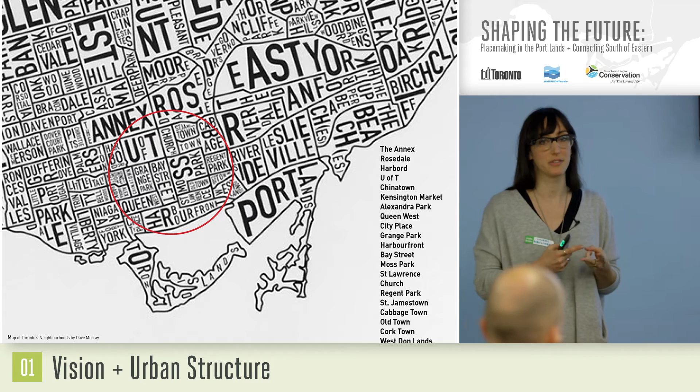These are diverse neighborhoods that have different histories, different characters, that accommodate different uses and different populations, all within this area. The same area of the Port Lands, which on the one hand, we think of singularly as the Port Lands, but it makes us wonder, is it just the Port Lands? And could the idea of diversity actually become something that's central to the vision?

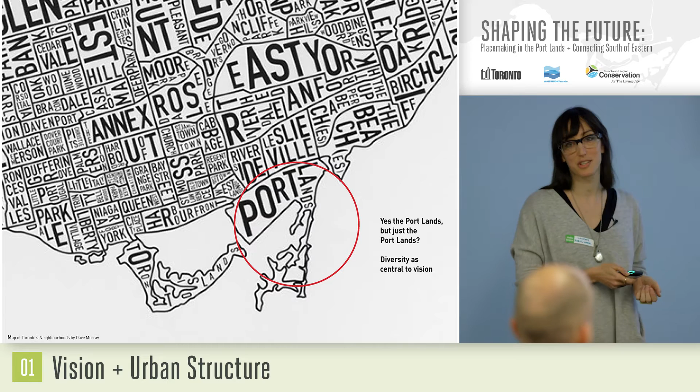So the vision for the Port Lands, we believe, can be as layered and diverse as the place itself and the people who inhabit it. Just like the city of Toronto, that can be its strength. And the vision for the Port Lands, we really think, in order to be diverse, has to be a collective one. It has to be ours.

It's actually big enough to accommodate multiple visions. So visions that are already underway, visions that we're talking about now, and visions that we can't even foresee yet in the future. But at the same time, we think it can also retain this really unique quality that it has, what we've been referring to as the one and only Portlands.

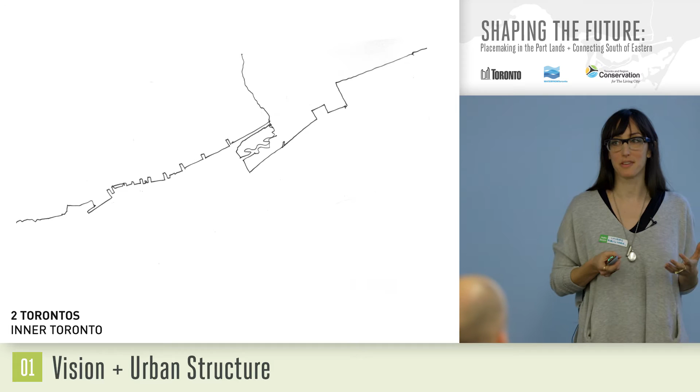And if you start to look more closely at the site, we think that there's already a kind of authentic diversity that's there now. So what do we mean by two Torontos? Well, this is kind of an observation that we've made. There's the inner Toronto, as we're calling it, which I think is the Toronto that we're all most familiar with. It's the urban Toronto, the one of streets, the one of blocks, the one of parks, the one of commerce.

But there's also another Toronto that maybe sometimes some of us forget about. It's this kind of wild green fringe that hugs the southern edge of the city. And it is occupied, it is developed in places, but it's developed in a different kind of way than the urban inner Toronto that we know.

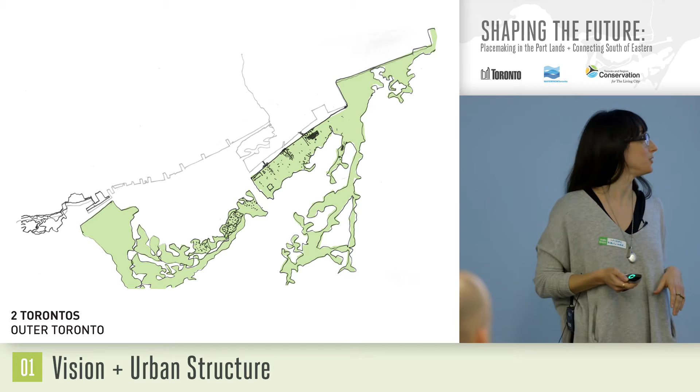And we think that's actually a quality that's really important to the wilds in the outer Toronto. And these two kinds of Toronto come together at this seam, this blue seam, which is the ship channel. And it makes us wonder if in transforming the Port Lands, that the qualities that are already there, these two different qualities, might actually inform, and might be something we can build upon, and that this significant blue ship channel element in the middle is somehow really central to the vision for how this neighborhood revitalizes.

And then we thought we would even start to look more closely and try to better understand what are the unique and inherent diversities that already exist on the site, the one and only Portlands. And so in order to do this, we held, amongst other things, a really great workshop two summers ago. We brought a whole bunch of different participants together, a range of backgrounds, and we thought if we're really going to have a ground-up vision, it has to come from all of us.

And so we started by really getting to know the site. We walked the site, we biked the site, but most importantly, we took a boat out, because in this water-centric area of the city, how can you possibly get to know it unless you're literally on the water? And we tasked participants with recording for us images, atmospheres, elements, objects, structures that represented to them the one and only Portlands, the qualities that made this place special. And we took this inventory of images and we started to call them the exceptions and the exceptional.

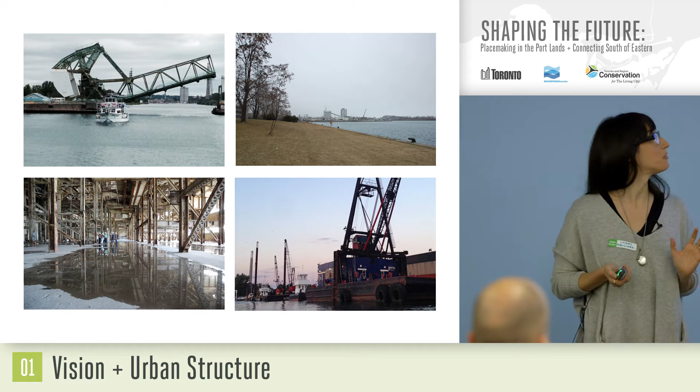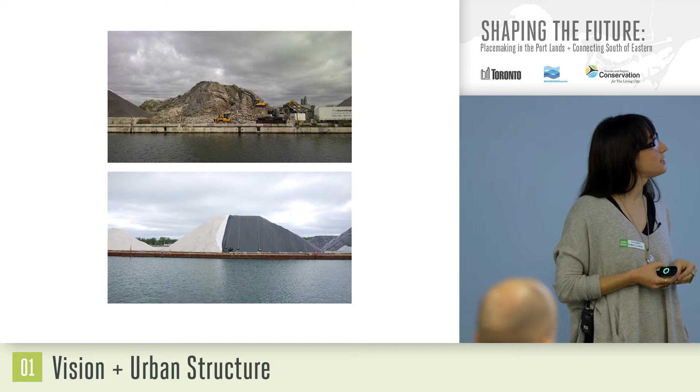We got a remarkable range of photographs, things that spoke to industry, both past and present: the absolutely awe-inspiring scale of the industrial architecture, and also this overgrown, strangely beautiful, wild and natural condition that layers with past infrastructures. And there's an active industry, work that's being done there daily, which also layers into what makes this place unique and creates these positive frictions.

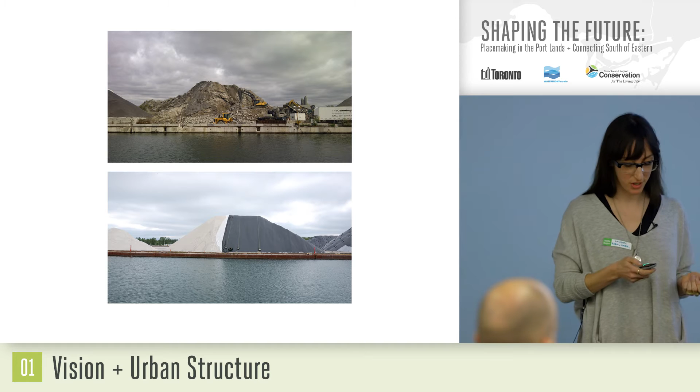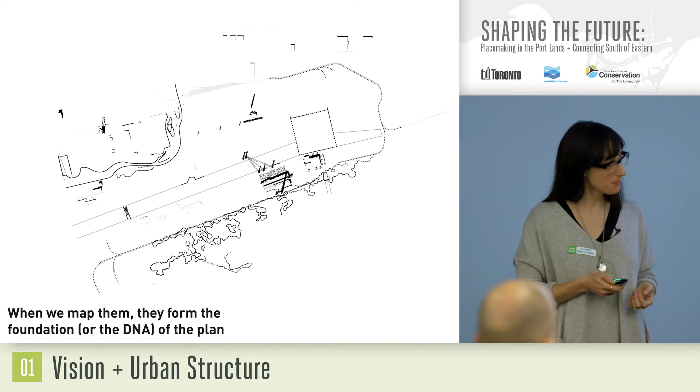So we mapped all these things out, and we think they're foundational to how the area is going to develop. We called it the DNA of the plan, upon which all of the layers would build.

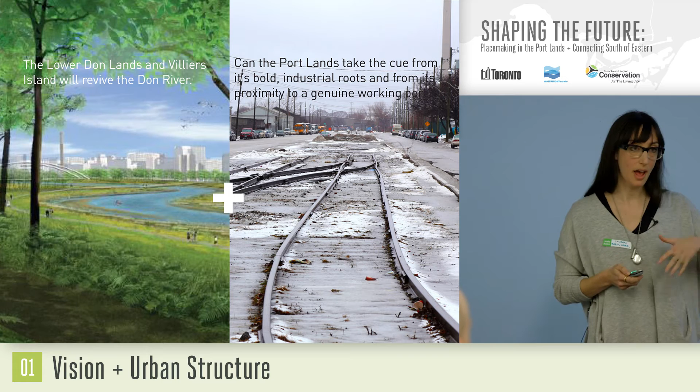As well as looking closely and exploring the site, we were interested in recognizing that there are some massive transformation projects already going on in the area — of course, the unparalleled in scale and scope restoration of the mouth of the Don, which is hugely important to the area. It made us wonder if the Port Lands, as a counterpoint, could take a cue from the bold industrial roots still there and the proximity to a currently working port, as opposed to a restoration to the landscape that used to be there.

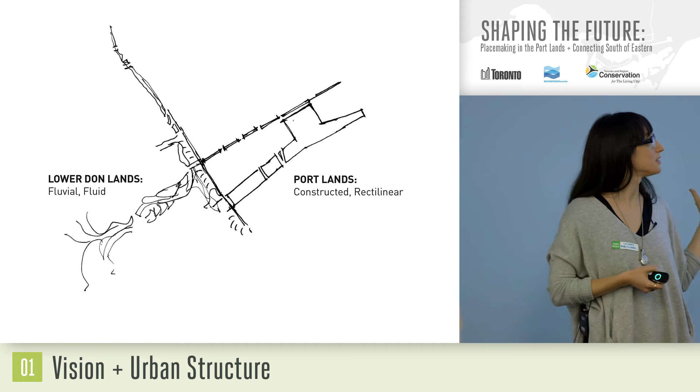We also looked at this in a structural way — might there be some clues for us where this fluid and fluvial nature of the transformation in the Lower Don Lands could be paralleled with a reading of the qualities that are more constructed, industrial, and rectilinear, which exist in the infrastructure there now.

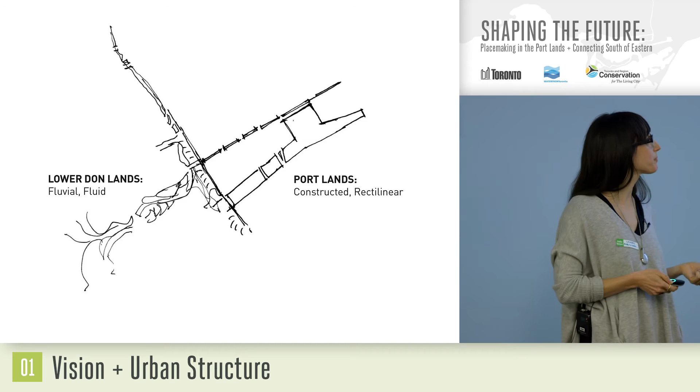It got us to ask this question: if the Lower Don Lands are reviving something that past industry has actually obscured, maybe in the rest, the Port Lands, we can celebrate industry — both what it's built in the past, what it's building now, and also what's yet to come.

I think this idea of building on the past to inform the present and then look further into the future — that's really the organic way that cities develop. It makes cities resilient, and maybe sometimes we forget that a little bit. I think we've become so good at delivering new developments that have all of the amenity and everything we desire right at our fingertips.

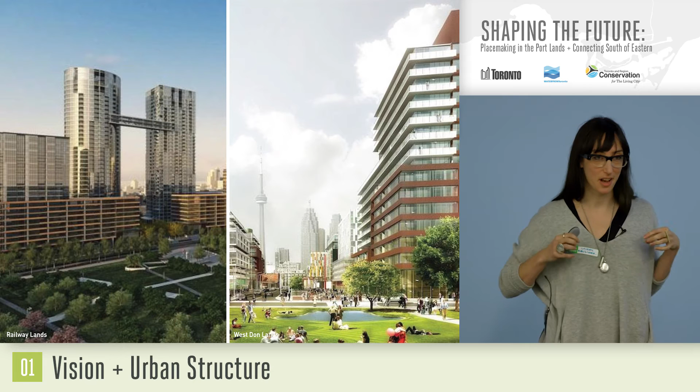They just spring up and they're complete and they're great neighborhoods. But it does make you wonder if they're able to start to accommodate unforeseen things in the future and changes that might come to land uses.

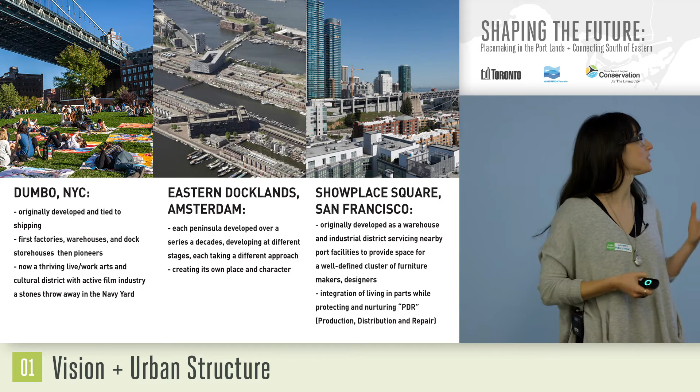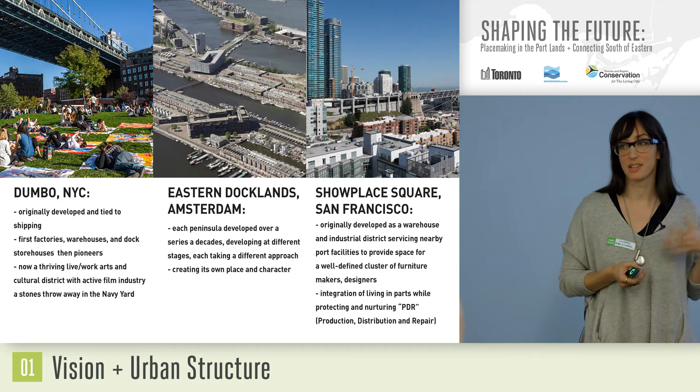So we've looked towards other places in the world that we think have done that really well and that enrich the environments of these places — in particular, places similar to the Port Lands that started as either port or industrial areas but then went through numerous reincarnations and new lives, such as Dumbo in New York City, which probably a lot of people know, once an area tied to shipping and factories. Later, because of cheap rents, artists started to move in, and now it's actually a thriving live-work community. Through all of these reincarnations, the legacy of the past is always brought forward and built upon, and we think that's fundamental to the vision for the Port Lands itself.

So we've tried to encapsulate that here in this text: a city is a process. The plan for the Port Lands will not be a finished article, not the end game. Rather, it will continue to evolve, as it always has, to accommodate the things we can imagine and perhaps some we can't yet. The legacy of our process will be the structure we set in place to accommodate this evolution.

A series of signature streets and open spaces, both blue and green, a fine grain of rational, robust blocks. First, they may house creative industry and commerce, later pioneer residences and communities. Our opportunity is to avoid the temptation to rush to a concise conclusion, preserving potential and recognizing that there is already a 'there.' The time it will take to evolve is its strength, not its weakness. This will be an entirely new kind of revitalization, one which not only celebrates built and natural heritage, but one which actively creates it.

This brings us to the way that we try to ground this vision and put in place structures that can help to actively create an evolving and flexible place in the Port Lands, because the Port Lands, like the city, will never really be done.

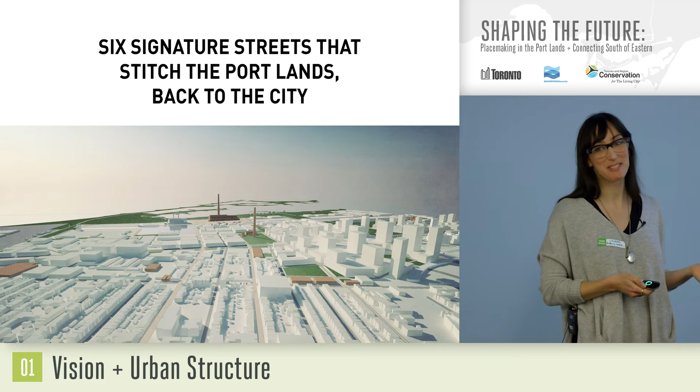The first action is this idea of stitching to the city. So 6 signature streets that stitch the Port Lands back to the city. These are north-south connections, around 6 of them. Some are existing and some are new.

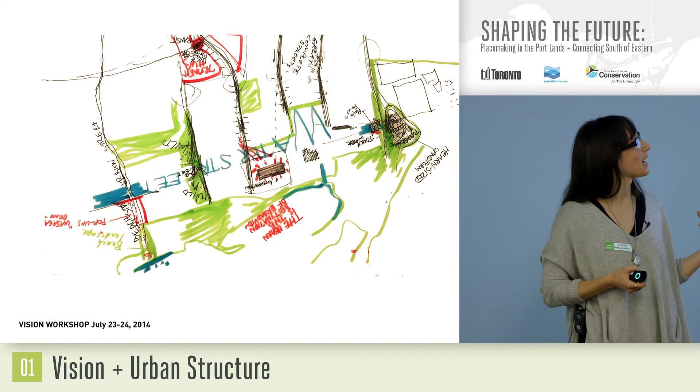This came out of the vision workshop as well as our own observations: these north-south connections aren't just about increasing porosity and bringing people to and through the site, but about drawing much deeper back into the city, creating sequences or journeys where the character of places beyond the Port Lands informs the character and quality of the streets within. So every street becomes a linear open space about sequencing journeys, not just getting you from A to B.

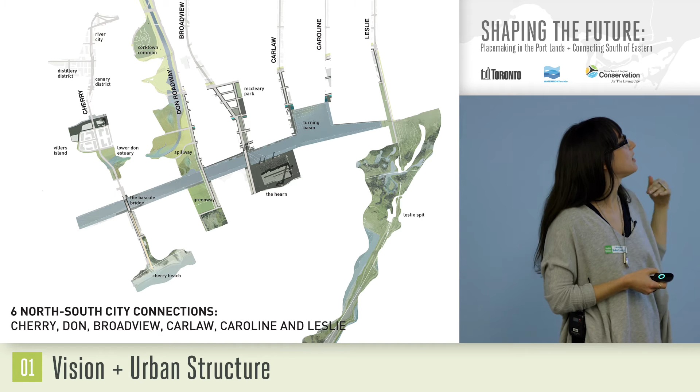Take Cherry Street, for example. Going north of the Port Lands, you pass through a whole bunch of interesting, distinct neighborhoods - the Distillery, the Canary District - you come across the Keating Channel, you're in the New Villiers precinct, then passing through a new estuary, and suddenly you pass over the beautiful Bascule Heritage Bridge, maybe even getting a taste of Cherry Beach drawn up into the street as a gateway.

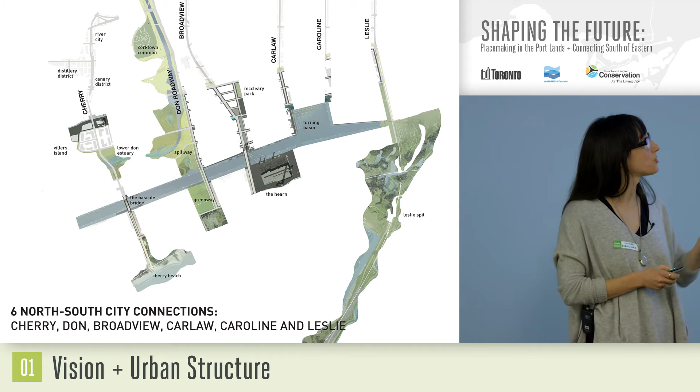Broadview - they're all really significant streets, but there's something particularly exciting about its extension: the opportunity for a civic spine taking you from the ravines down to the harbor. From Riverdale Park, one of Adam's favorite views of the city, you get an amazing view to the skyline and the CN Tower.

We wonder if, in the extension of the street, you could actually start to connect to another landmark tower - the amazing resource which is the Hearn, which we think has so much opportunity and potential to redevelop as a new cultural hub destination, both for the area, the city, and even further abroad as a destination.

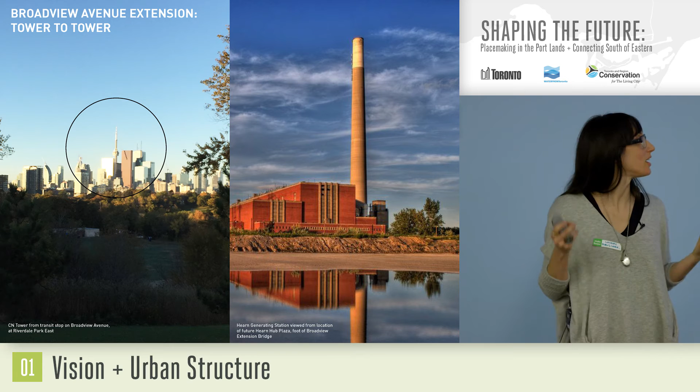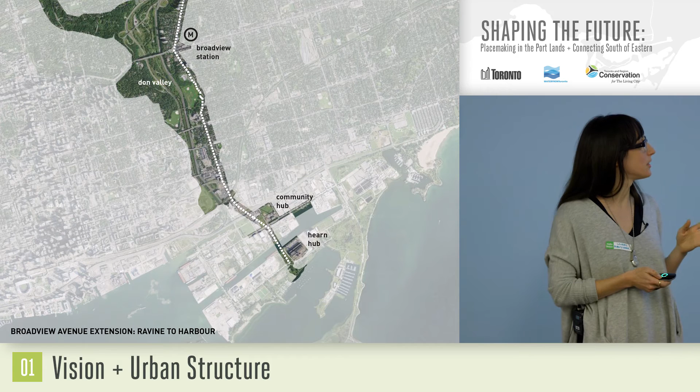This is what it might look like: connecting all the way from the ravines and the high-order transit up at the subway station, all the way down through a whole bunch of neighborhoods, through the Port Lands, connecting different hubs down to Lake Ontario itself.

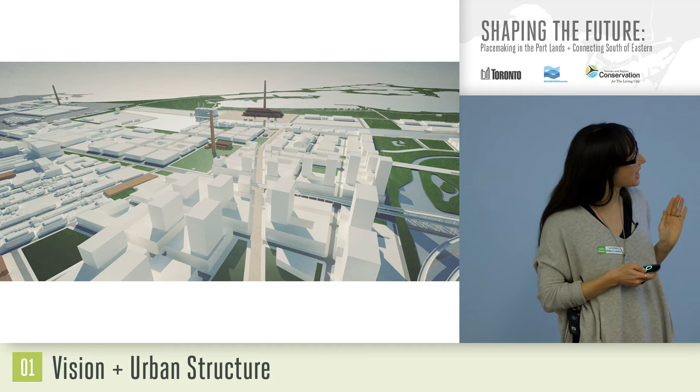The street itself has been aligned so you might get this really nice axial view for part of it, announcing the amazing presence and quality of the Port Lands and the Hearn as you go down the path. On the ground it might look something like this.

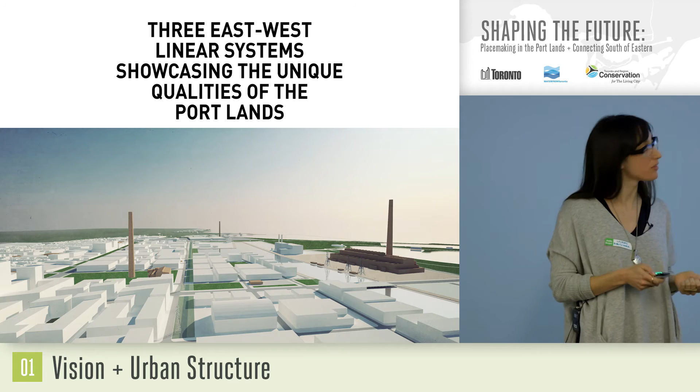The next point is uniting the harbor and the wilds, dealing more with east-west connections - 3 east-west linear systems that showcase the unique qualities of the Port Lands. Notice we say systems, not streets, because only 2 of them are streets: the Ship Channel's important spine, Commissioners, with a totally different quality, and Unwin in the south, which borders the most wild, unkempt, and beautiful nature in the area.

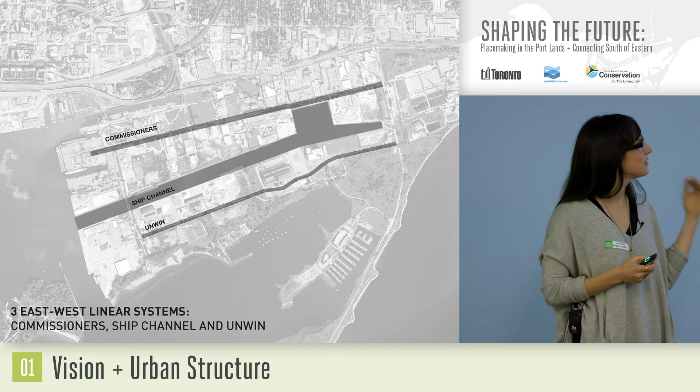And then the third, which is the Water Street, the Ship Channel, which we think is equally as important as an east-west system, even though it's not an actual vehicular road itself. And these 3 systems kind of come together and they meet at the seam at the Ship Channel.

And they're also anchored by what we think are 2 really significant opportunities for public open space. One is the revitalization of the Hearn and a really significant public plaza around it. And the other is a sort of less conventional way of looking at open space at the current turning basin, a kind of blue square, and what it could mean to actually think about water as a water square.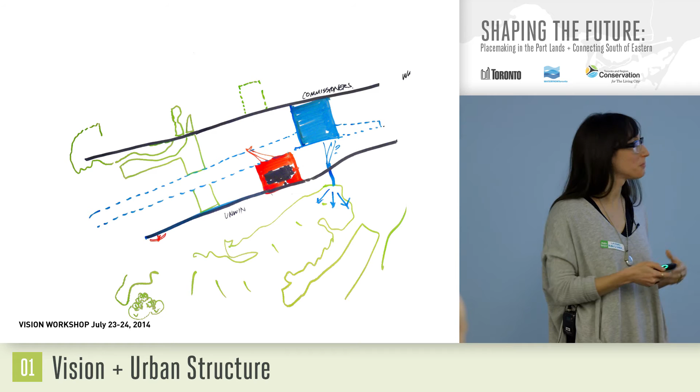As an equally viable and exciting opportunity for being part of the open space. And so they all come together and form this kind of robust east-west armature. And they might look something like this, each taking cues from the characters that are already existing and developing elements within the streets that draw from the character that's there.

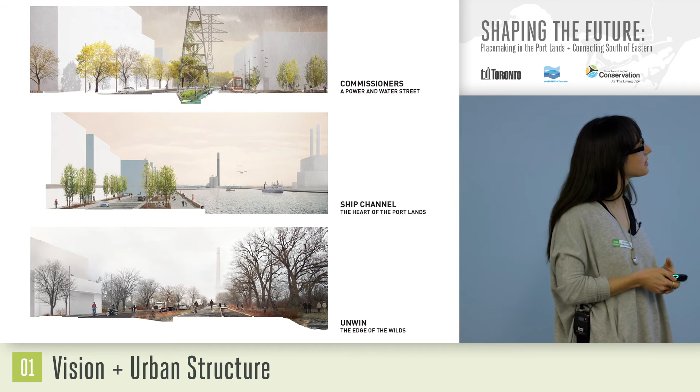Something that's kind of interesting when we're talking about the Ship Channel, this came out of the workshop, is it's almost 3 kilometers long. And when you look at streets in the city, you never have a 3 kilometer long street that's just the same for the entire length. So why should the Ship Channel's edge be? So for that reason, we're looking to bring a sort of diversity of character and function across the length of the channel.

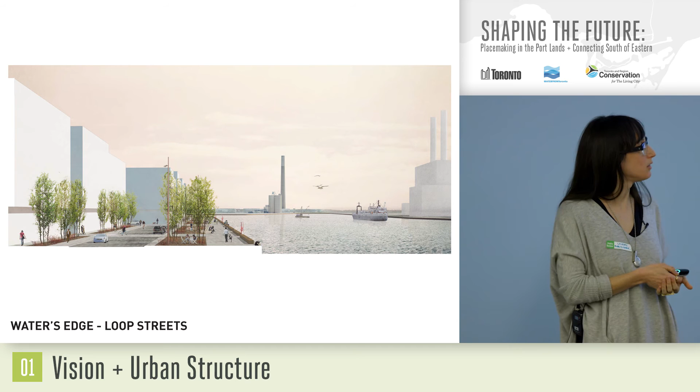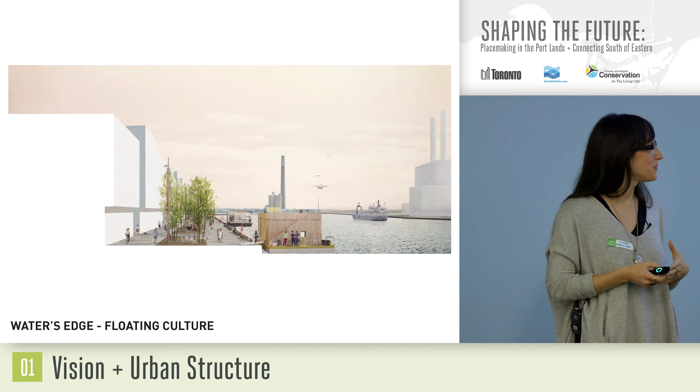So there may be loop streets in places that could activate the channel, particularly in winter seasons. Also very generous and extended places that are only for pedestrians and cyclists. And there might even be the possibility to explore extending the public realm out onto the water surface with new forms of floating culture that actually kind of double the amount of activity that you could have down there.

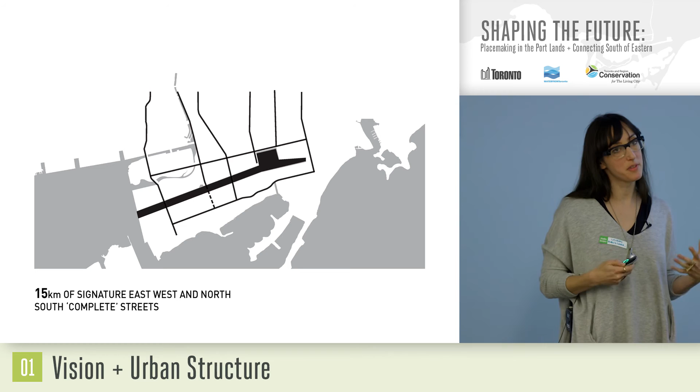So when you bring all the north-south and east-west systems together, you get the system of the major streets. And it's really important to kind of talk about these streets not just as conveyance systems for cars, but really as places themselves, as linear open spaces that are not secondary to the open space network, but are actually places where public life and the public realm can unfold. And I think we have a lot of opportunity here to actually start to create really unique places.

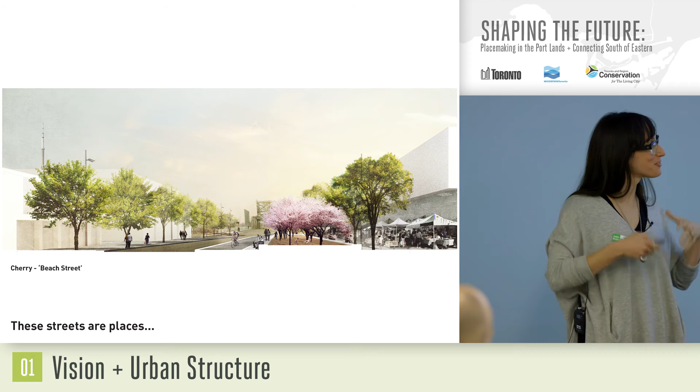So for example, on Cherry Street, like I mentioned before, there's an opportunity to even draw the beach up and create a kind of gateway promenade that might even have signature cherry trees and even a kind of sandy playground. And sort of similarly complete in that it accommodates all the different kind of balance of modes that you would want in a street, but completely different in its character.

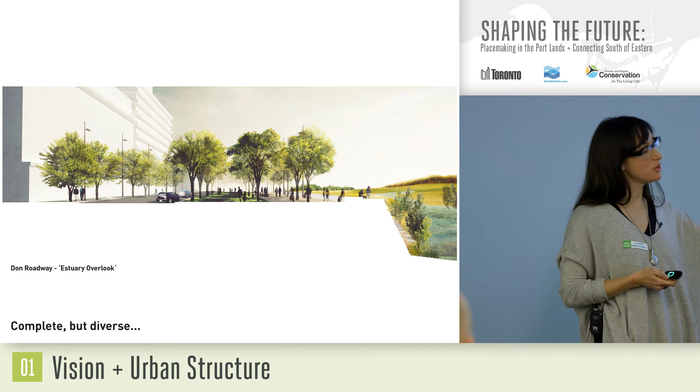The Don Roadway, a kind of continuous boardwalk along this beautiful new green estuary edge. Of course, all of these major streets would accommodate cycling, which is a huge priority and really, really important as a very viable mode in the transportation network, and they would do it in different ways: cycle tracks, multi-use trails.

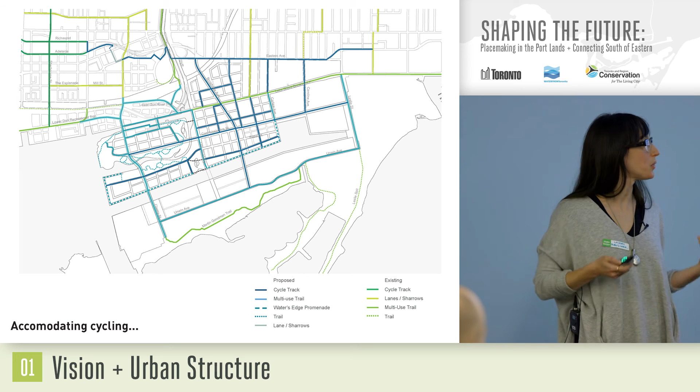Similarly, transit, a robust transit network would be accommodated throughout the area, and in places where we may not have the ability to put the entire network in place, we would absolutely protect it in the future so that we wouldn't preclude the ability for the transit system to build itself out more.

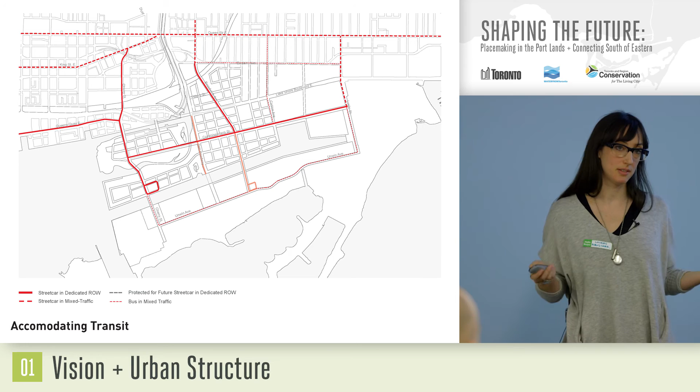All right, so the major network is just kind of one piece of the framework, but I think in order to really achieve this kind of flexibility and evolution, ability for the place to evolve over time, you really have to have a robust network of local streets, and that's what really can generate the diverse urban fabric.

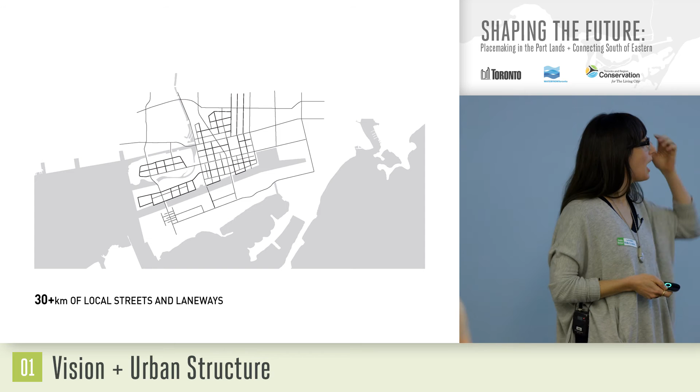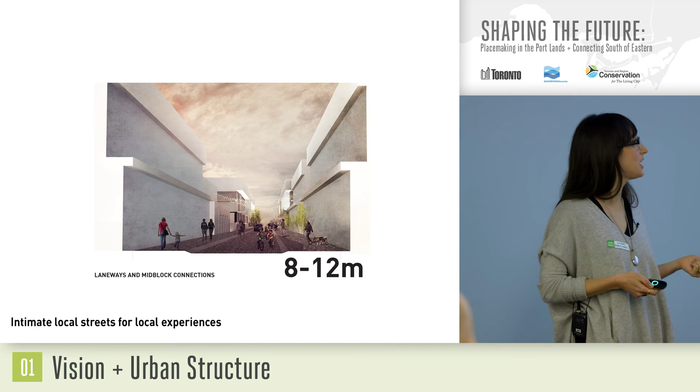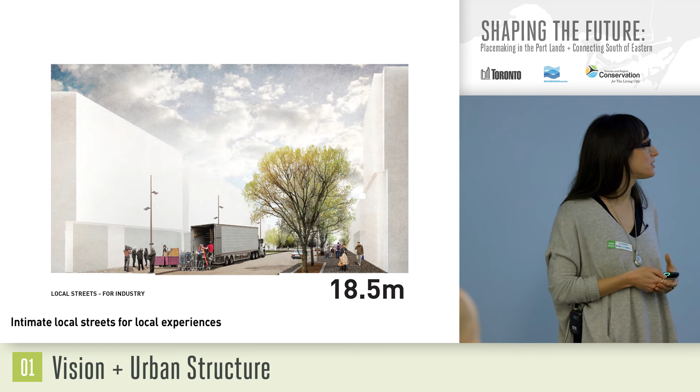And this could take the forms of kind of cozy shared laneways, or very tight but still very functional local scaled streets, some that might prioritize the industrial activities, others that would prioritize spill out and pedestrian and cycling activities, which all come together in a resilient local street network that can allow for the evolution of diverse and memorable districts within the Port Lands.

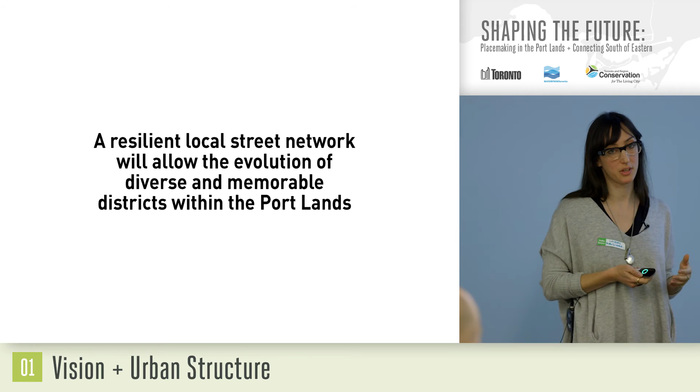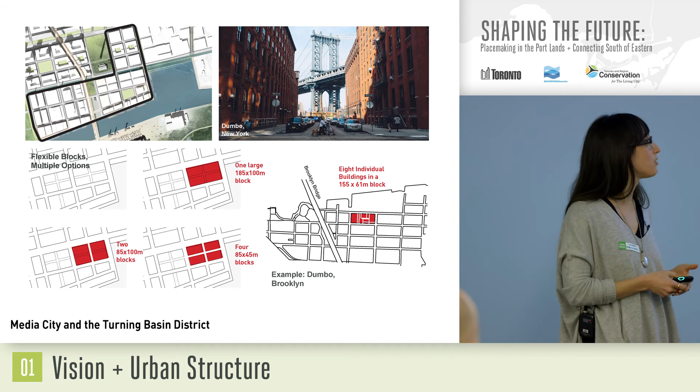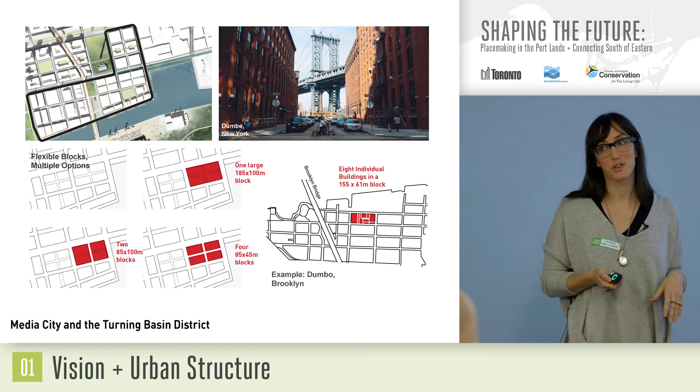When we were looking at the block structure, one of the most important things was this idea of flexibility, that the blocks would be able to break down in scale and accommodate different scales and uses of building over time. The legacy we can leave here is a street grid that accommodates those differences, so the local network is already in place, even if blocks come together in a current industrial state, there's opportunity in the future to break it down further.

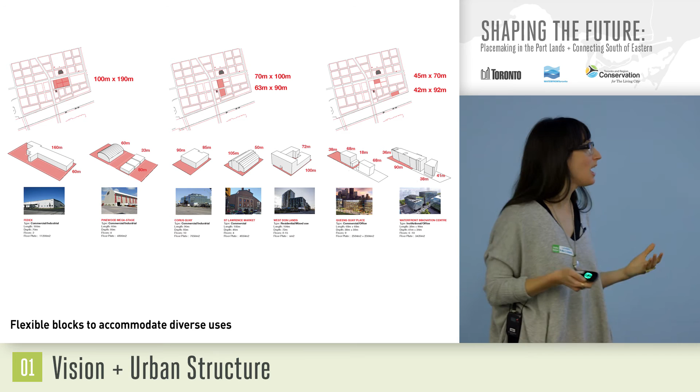We've tested all sorts of different types of uses of buildings, some very familiar to people. It also says a lot about the scale of this place. If you look at the middle pink block, it can actually house the St. Lawrence Market—that's a sense of how big the blocks are. You could imagine a block that size could further break down and accommodate a whole bunch of other buildings over time.

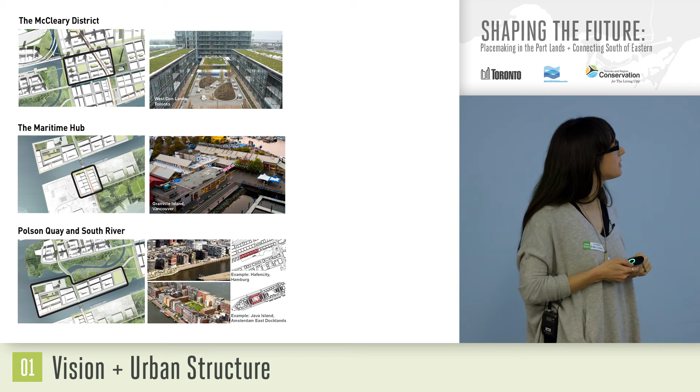We did a similar exercise looking at the block structure in all the different neighborhoods, always with this idea of a grain that can break down, but also exploring different forms—courtyard forms as well as finer grain in certain areas, anticipating current industrial uses, but also imagining these forms could transition to mixed-use communities, to residential, as time goes on.

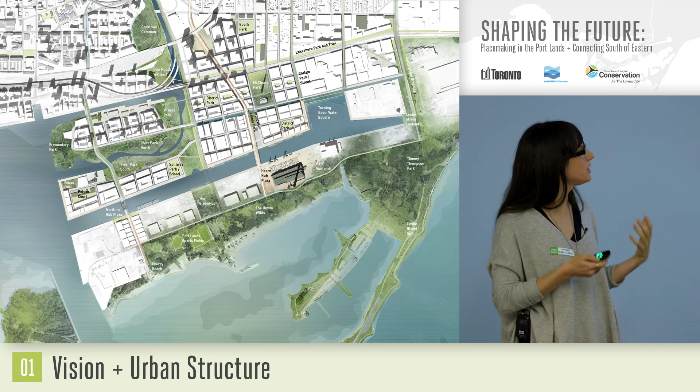When you take that network of streets and linear open spaces, and layer on top a green open space system, we can first talk about it the way we'd traditionally talk about an open space network—a series of different kinds of green spaces, recreational spaces, and squares. Built into this open space network is a diversity of different uses.

But what we've tried to do is take it one step further and ask: does the open space network just have to be about green, or what about this blue character that's so important and meaningful to the current quality of the area?

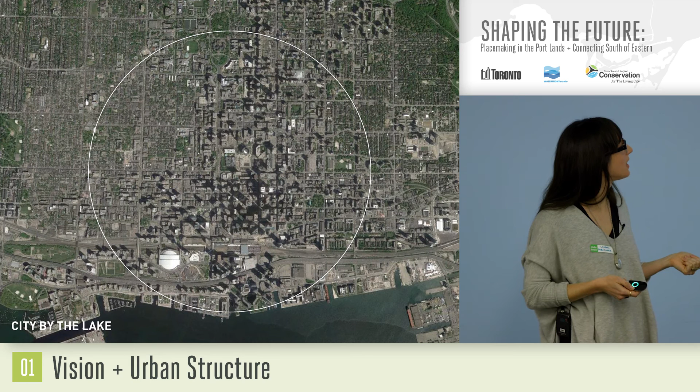If we look at the city of Toronto, we always think of it as a city by the lake, adjacent to the water. But if you look at that same circle on top of the Port Lands, it's remarkable that the Port Lands isn't the city by the lake—it's the city in the lake. This is really, really meaningful.

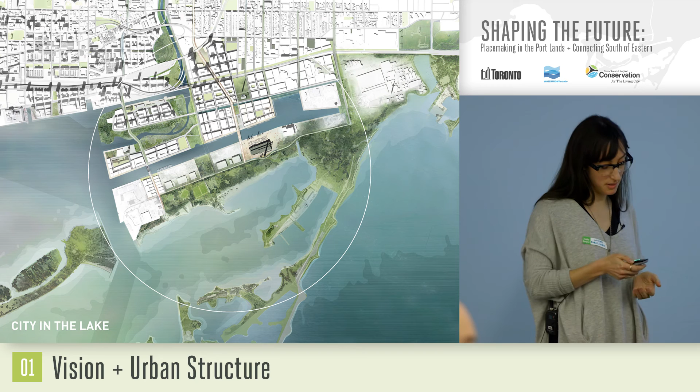What this starts to say is that maybe about a third of the area would actually be developed buildings, servicing, parking lots—the urban stuff we know. Then maybe a third would be the more traditional open space network with a connected system of green. But still a third is water that we're inheriting in this amazing form in the Port Lands.

So if you flip that to get a picture of the extensiveness of the open space system—if we first start with the more traditional way, just looking at green—the network of streets, parks, and open spaces would look something like that.

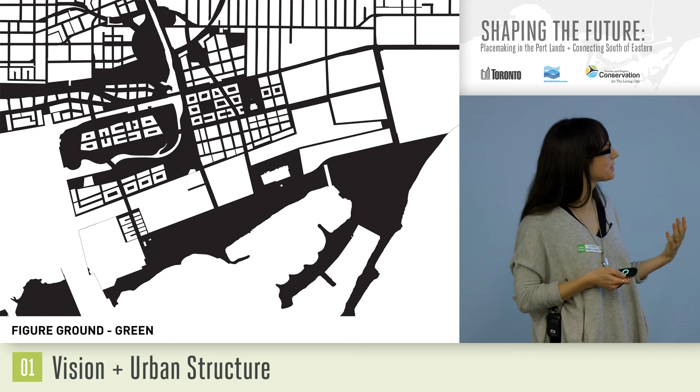And I guess our provocation is, what if we actually take that one step further and add in the blue, and then all of a sudden the public realm, which is the place where we spend so much of our time when we're out of the house, is actually really extensive and really immense and exciting. And this isn't something that's new. We have to look at other cities that have done, that operate in similar ways, where water is not just something to look at or something that's on the side.

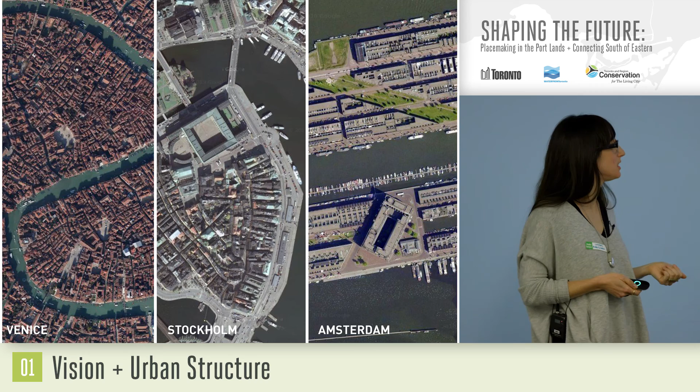So again, we could imagine that water isn't just the lake isn't just something you see, it's something that you interact with, you float on, you jump in. It also is something that works. The presence of water also helps to clean and to support industry. And all of these myriad uses of water are somehow integral in informing the public realm.

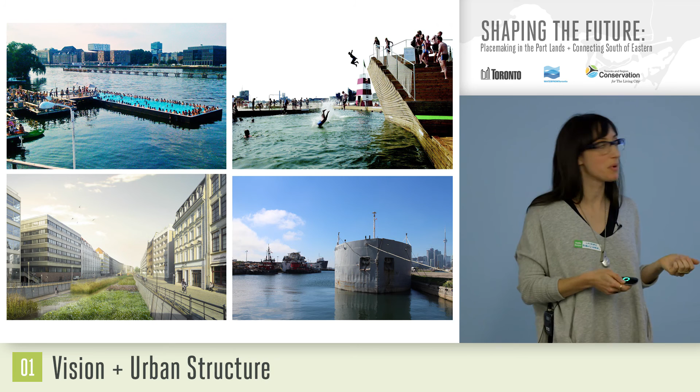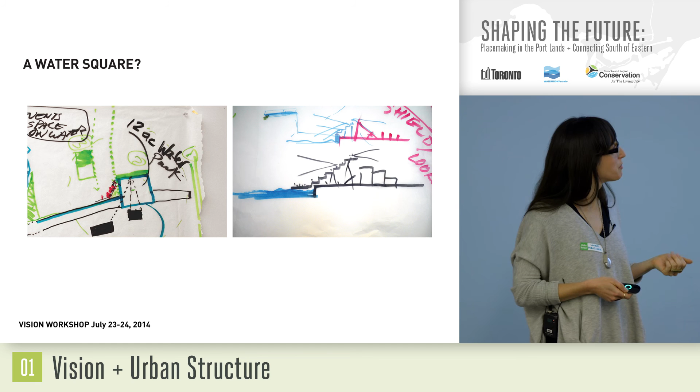As we mentioned before, the idea that a water square could actually be a really significant public space is something that came out of the workshop, something that's really exciting and that you see in other places in the world, and something that might be able to take on any number of different characters, but we think is a really interesting opportunity in the plan.

So there's the water that we've inherited that's around the site, but then there's also the question of stormwater and how we deal with the water that falls on the site, and that's so commonly and conventionally just kind of channeled underground into pipes. Is there not also an opportunity to have that water become a meaningful part of this plan?

We heard things in the workshop like, shoes off in water in a street. How great would that be? Let's get our feet wet. And I think this idea of getting our feet wet has really started to inform some of the principles and the way that we're looking at water, and also how that's being developed in the design of the streets themselves.

So identity, clearly the water is a huge part of the identity here, but we think it can actually even be more active and structural. So the streets and the open spaces can actually start to integrate the conveyance and the cleaning of stormwater in features that aren't just for technical reasons, but also have an opportunity to be places that people can gather, places to enhance the quality and spirit of the public realm.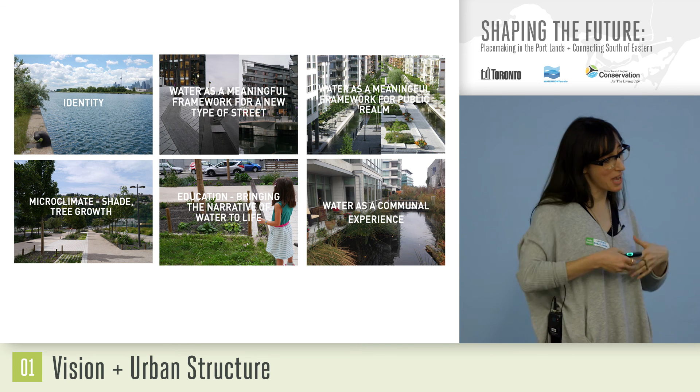Of course, that also provides areas for shade and microclimate, and similarly an idea that we can bring to life the narrative of water that is so often just channelized underground. What if we daylight that? What if we make people more aware of the fact that, by paving all of our streets and paving all of our properties, we're actually doing an enormous disservice to this communal resource, which is Lake Ontario and all the natural resources that are based on that?

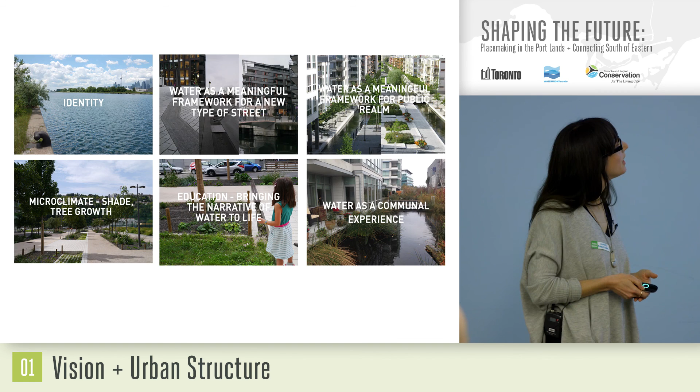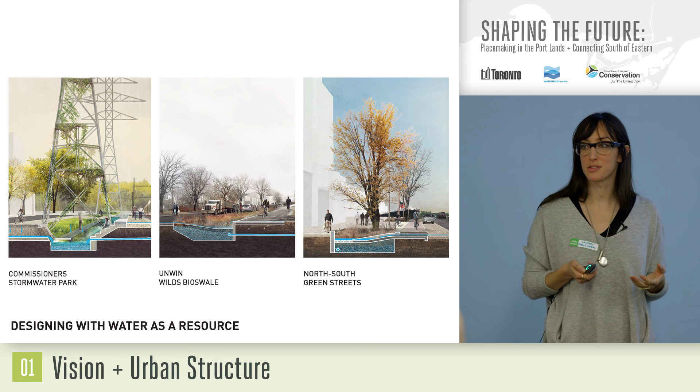So we've really taken this quite seriously and started to explore how the streets can have open features, open swales, open channels that actually celebrate the presence of stormwater. So they work in a technical way, but they also provide really interesting and unique environments that are kind of geared to the individual quality of the streets.

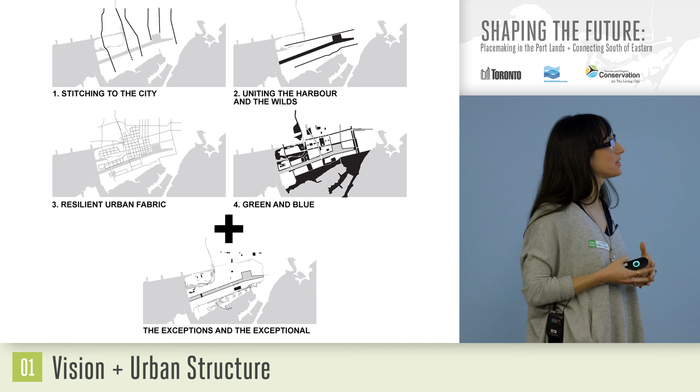So if you then put those structural layers all together, the stitching of this back to the city north-south, the important connections that we can make east-west from the wilds all the way through to the harbor, the idea of filling that out with a diverse, fine-grained urban fabric that is flexible, that can accommodate evolution and change over time, and finally, this very robust open space network that's not just green, but that's also blue.

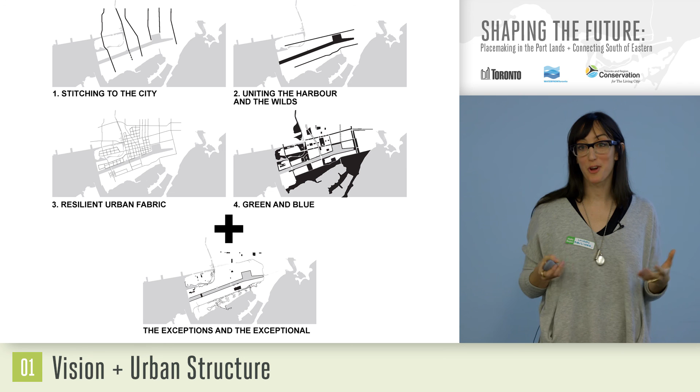If we put all those layers together and then confront them and superimpose them on what we call the DNA, the foundation of the plan, which is the exceptions and the exceptional things, which are both artifacts but also active qualities and diversity that exist on the site — if you put that all together, you get what we're calling the framework plan, this flexible structure plan, which can connect some of Toronto's most significant existing and future open spaces, both blue and green.